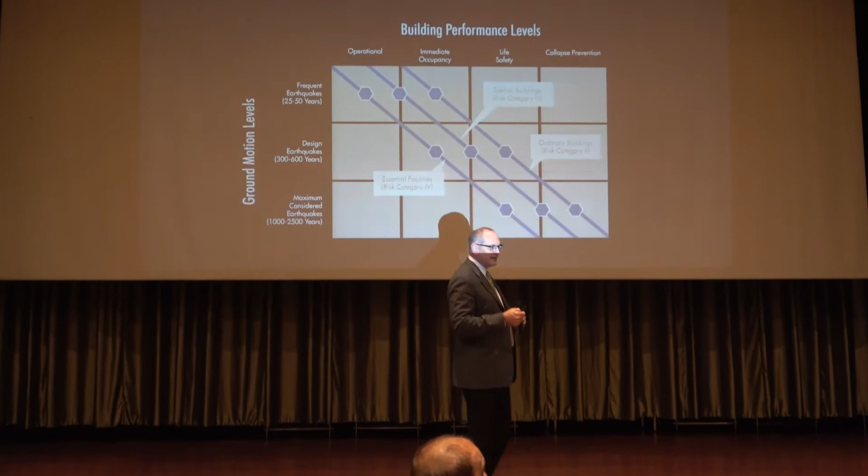Anyway, the point being here is that there's different levels of earthquake and different performance objectives that you might target. And this is a framework that was established actually back in the 1940s and 1950s, but there wasn't a methodology then to specifically allow engineers to assess each of those targets. It had to be simplified.

And so, this is a little bit late, but I think you all understand. Everybody here, I think, is an engineer in the room.

And in the 1940s and 1950s, there wasn't the computational ability to easily calculate and assess that nonlinear response. So what did they do? They came up with this magical factor. These days, we call it R. Before R, it was R sub W, and before R sub W, it was K.

But basically what it does is take the design earthquake and divide by a number, somewhere between 3 and 8. And that number is somewhat reflective of the ability of the system to respond ductilely, to respond nonlinearly to the earthquake, reducing the forces so it allowed the engineers then to do a simple elastic analysis and simplified hand calculations.

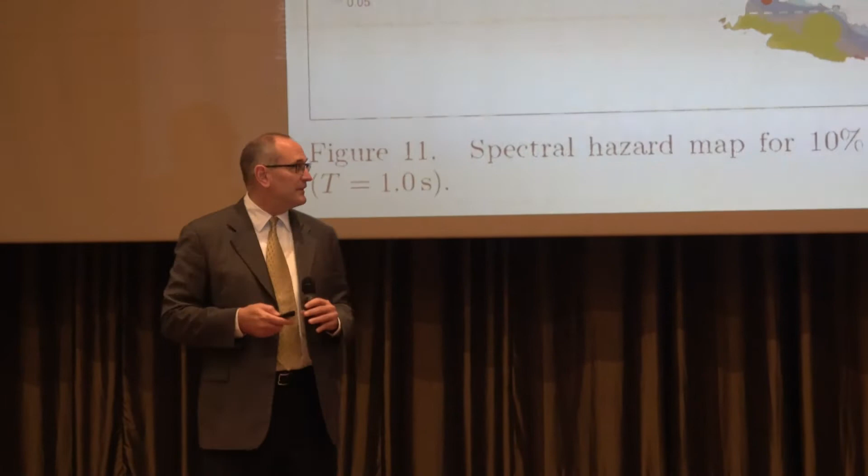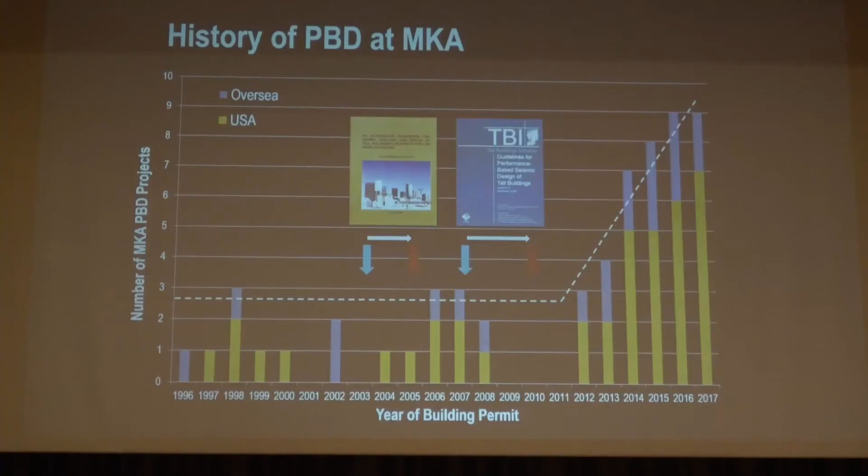A little bit of a history lesson then. I mentioned I started doing performance-based design about 22 years ago, and here's a little bit of a timeline. Starting in 1996, this bar chart represents the numbers of buildings our company has designed over those years. The first one was actually in the Philippines. It says 1996; that's when the building was completed. We actually started the design in 1995.

Asian Star Building was the name. It's in Alabang, outside of Manila. And it was the first time that we tried to implement what we then called displacement-based design. Ultimately, it became performance-based design, but this is the very first one that I'm aware of that followed this methodology. And so from there, we started doing a number of buildings.

The first one in the US was a fairly modest scale building outside of Seattle in Bellevue, Washington. And then we decided to scale it up, and these two towers in the Philippines, Pacific Plaza Towers, were done in the late 90s. This was really the first adventure into fairly tall buildings where we were using performance-based design.

Around that time, a number of groups on the west coast of the US started to gain interest in this approach, in this methodology. And in Los Angeles, the Los Angeles Tall Building Structural Design Council put together this guideline, the initial edition of which was in 2005. So now we're talking 12 years ago or so that this was published for the first time. And that was trying to give engineers some guidance as to how to go about performance-based design, at least in the Los Angeles setting.

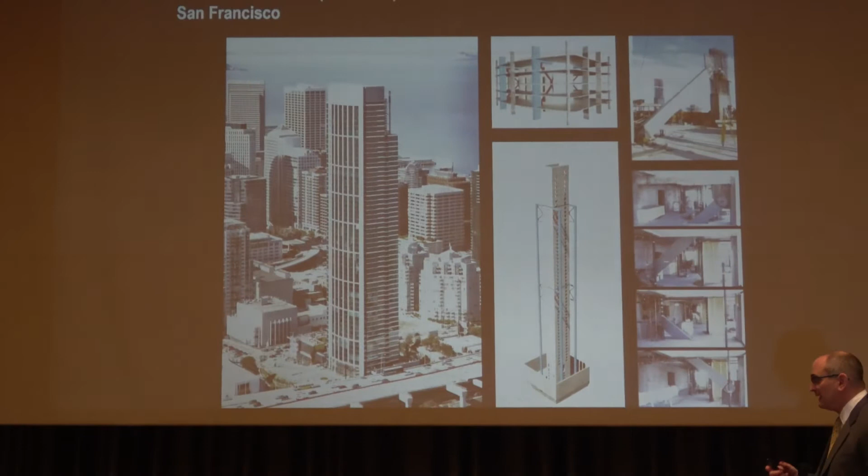The poster child, I suppose, for performance-based design for the last 10 years or so has been this building, Rincon Hill. And not only because it was a very tall building with a central concrete core, but it also had an outrigger system you can see here in this diagram, that had a series of buckling restrained braces used as outriggers. And so, in terms of the prescriptive language of the code, it was an undefined system.

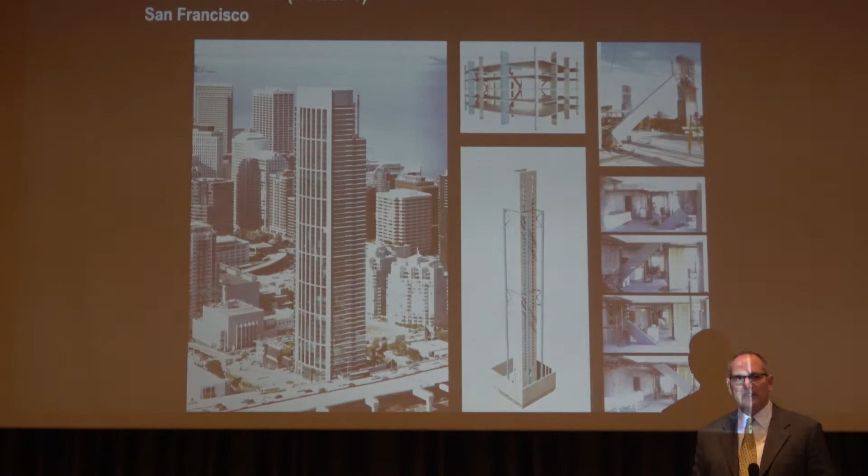Not only were we going to design a very tall building in San Francisco in a high seismic zone, but we were using a system that wasn't described in the code at all. And so how would you go about designing this? And so once again, this building went through a lot of scrutiny, peer review, but it became kind of the poster child. It's on the cover of many of the guides and documents about performance-based design.

On the heels of that building, the city of San Francisco wrote a guide. So if you're practicing in San Francisco, this kind of lays the rules of engagement. It was written by the Structural Engineers Association of Northern California. The Council on Tall Buildings and Urban Habitat published a guideline in 2008 attempting to introduce the international community to this methodology. And then, many of you are probably familiar with the PEER TBI guideline, which has served really to guide the industry since 2010. All of these documents, to one degree or another, I've had a hand in writing, and I'm still writing them. I have a few versions down here.

Subsequent to those buildings, the buildings seem to get taller and more ambitious, and time has marched on, and we've done more and more tall buildings. And most recently, a building in San Francisco that has a mega brace system on the outside. There's no concrete core in this building at all. It's a mega brace system. And all of these buildings in downtown San Francisco, for instance, have been designed and built using performance-based design in the last 10 years. So it's very prolific.

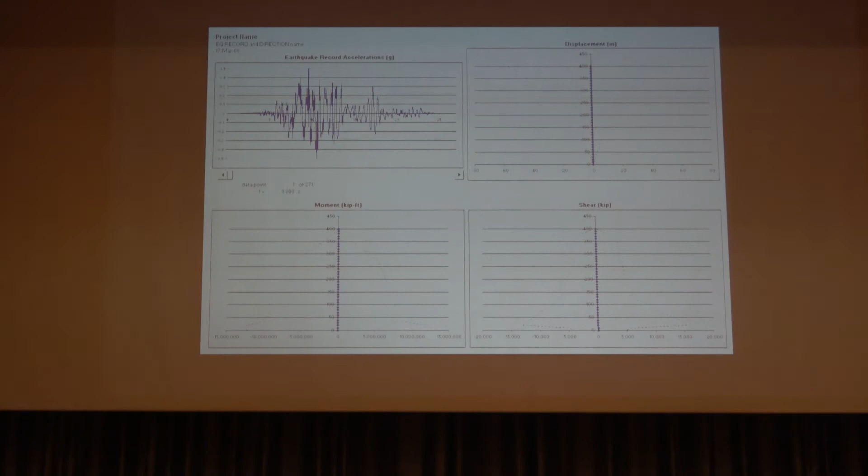Okay, we'll move on. All right, so what you would have seen, if the animation would have been successful, is that the deformation of the building isn't a first mode response. It doesn't sway back and forth like this, in fact, until the ground has stopped shaking. What you'd see otherwise is the building starts to whip like this, kind of like a snake, right? And that's the input energy of the ground shaking, making its way up the building. And so the building gets into a second and third mode response very quickly. And in fact, it doesn't even get to that point until the ground motion is well into the peak response.

And I use an analogy, I say, a building responds to an earthquake a lot like my teenage son responds on Saturday morning. He's sleeping soundly in his bed, very peacefully, and I go in and I go to wake him up. I shake him, I shake him again, I shake him harder. Finally, he wakes up slowly. And then after the shaking and finally waking up, he finally comes to.

This is exactly how a tall building responds. The ground starts shaking, and initially the tall building looks, what? What happened? And it's only after a bit of time that the building actually wakes up and starts to respond to that ground shaking. And after the shaking's over, the building actually starts to sway in first mode. And we see this time and time again with tall buildings.

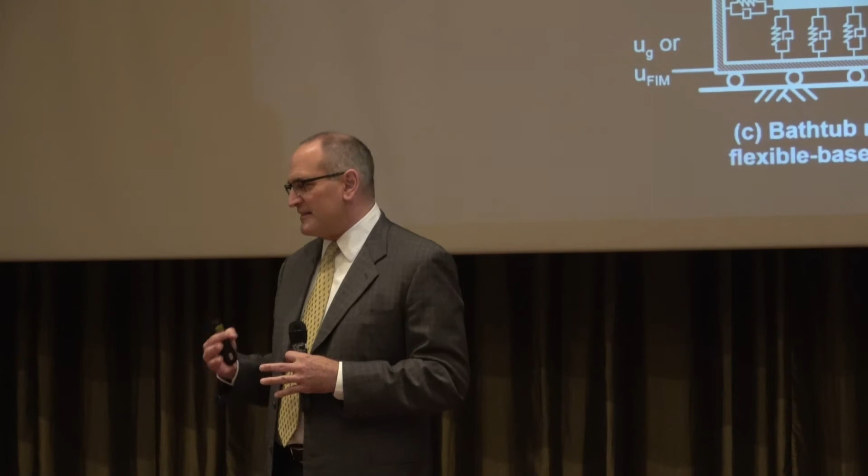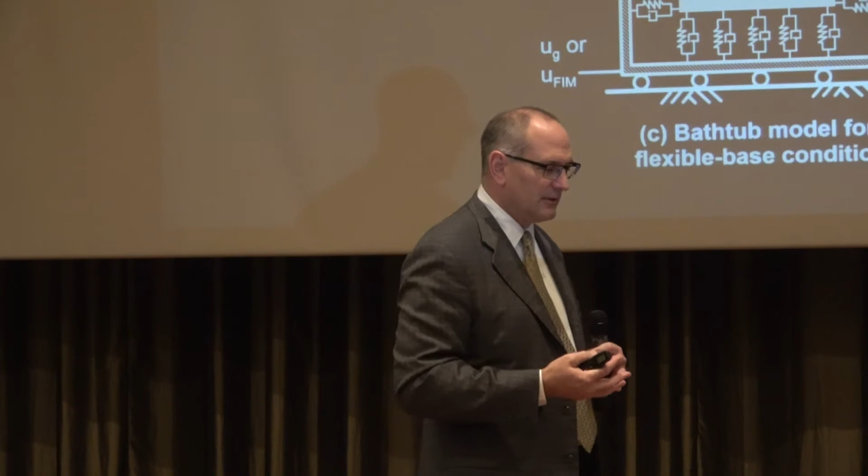Another topic that is seeing a lot of interest, a lot of research, and a lot of uncertainty right now is the embedment effects or soil structure interaction effects of the tower. To date, I think most of us in the practicing world assume that the tower goes down to its foundation and it has some pin supports, vertically fixed, translationally fixed, rotationally free, but don't consider much in the way of the embedment effect in the surrounding soil.

The reason we don't do that is we don't know the answer. The stiffness properties of the surrounding soil are highly variable, and at best, from our geotechnical friends, a guess. And so practice has been to date ignoring all of that, and I'd say somewhat conservatively ignoring this kind of a model, but instead doing something more like this. That continues to be the practice, but there's growing interest in these much more sophisticated models.

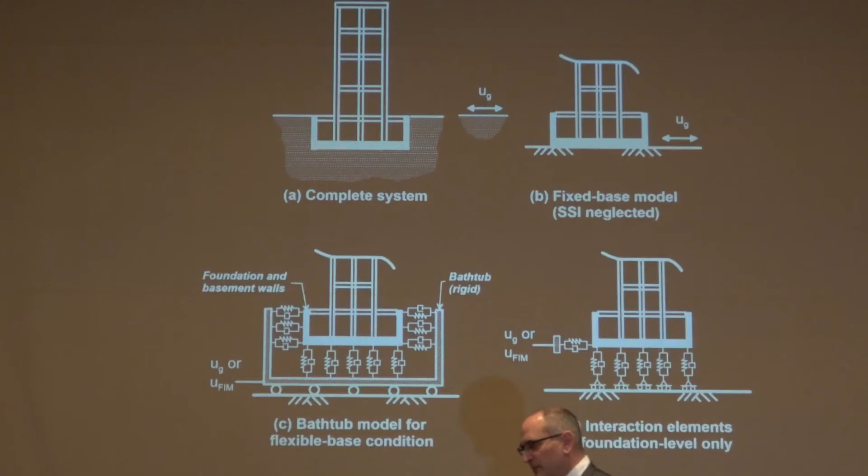We do have the tools to allow us to technically, numerically model those effects, but we're not confident that we understand the results when we get the outcome. So I just put a big note of caution there. If you choose to try and assess soil structure interaction for your seismic performance of your tower, be cautious and be very skeptical of the output.

In fact, maybe best if you're going to do that, test the sensitivity of your analysis to your assumptions. And I think what you'll find is the sensitivity is very high. And small changes in your spring and damping assumptions for the below-grade soil can change the results wildly. So this should cause you some pause as an engineer and inform your decision-making.

Note that as the ground motion starts shaking, you'll see again this wiggle in the building. It doesn't really sway, it wiggles. Only after the ground motion is stopped will you start to see the building sway. So watch carefully. It's very subtle. So the ground's just beginning to shake, and now the ground motion is going to start. There it goes. You can see it wiggling a little. You can see the snake there now. It's got a big bend in the middle.

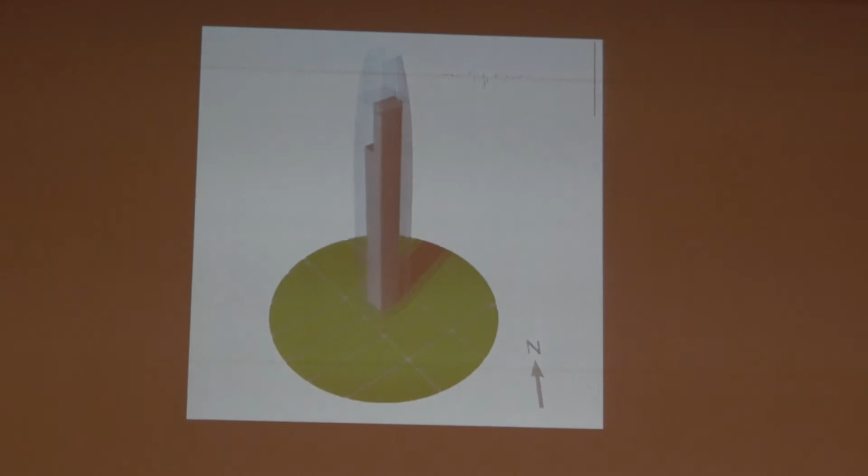And it's still kind of wiggling around a bit. And now the earthquake's going to stop. The ground motion is nearly done. And lo and behold, there goes the first mode. And it's not until the ground motion has already ended, essentially, that the tower actually starts swaying in the first mode. And at that time, the amplitude of sway is fairly large, but the shear demands in the building are pretty small.